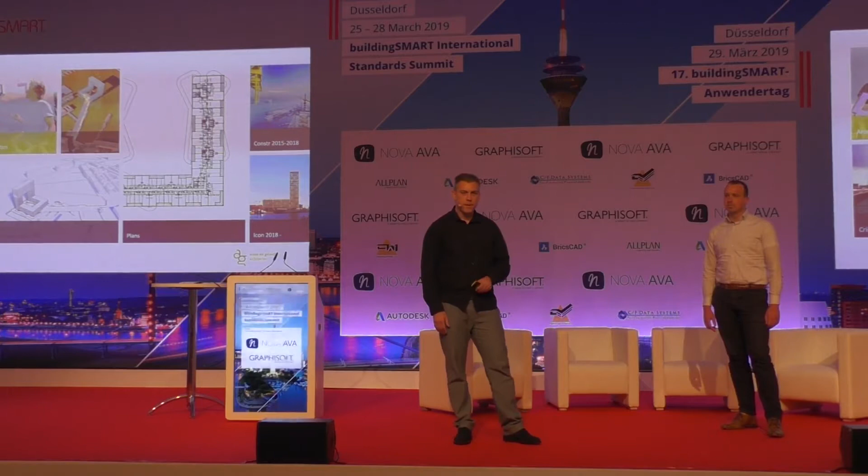But why does this building look like a chair? We were allowed to build a tower 150 meters high. What should we do? Because all the local towers in Amsterdam are about 90 meters high. It's a housing project, so we need to take into account where people would like to live. It's no surprise that most people would like to live in a penthouse or at ground floor. So an hourglass shape is therefore the optimal solution.

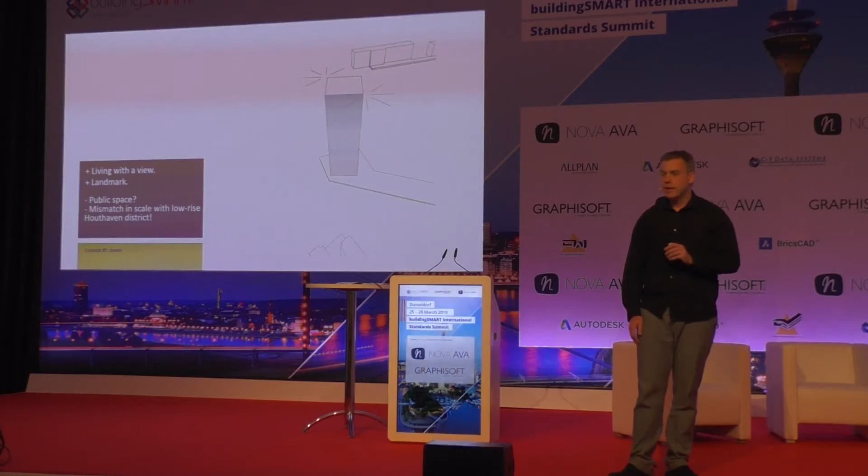Of course, we tried many other shapes. Let me recap months of hard design work in a few simple steps. A tower - a high tower would definitely be a landmark. You would have a great view over Amsterdam and you can even see the sea. But what about the public space? Tower entrances are always windy, the view is for the happy few, and the surrounding area, Houthavens, will be low-rise.

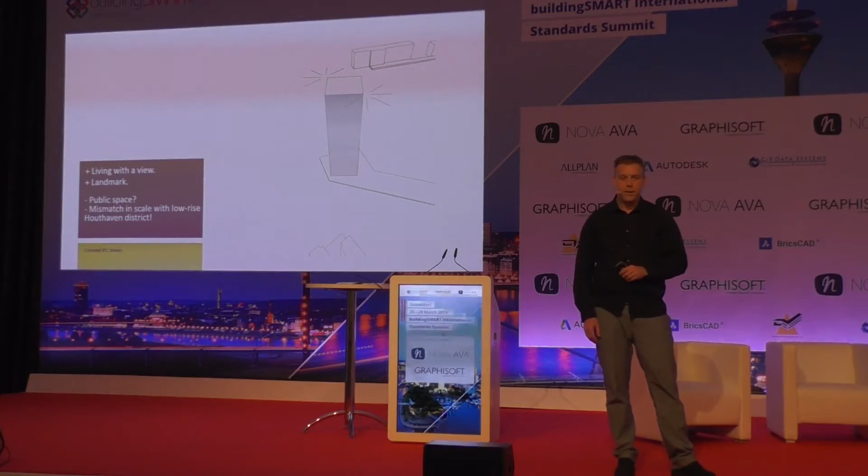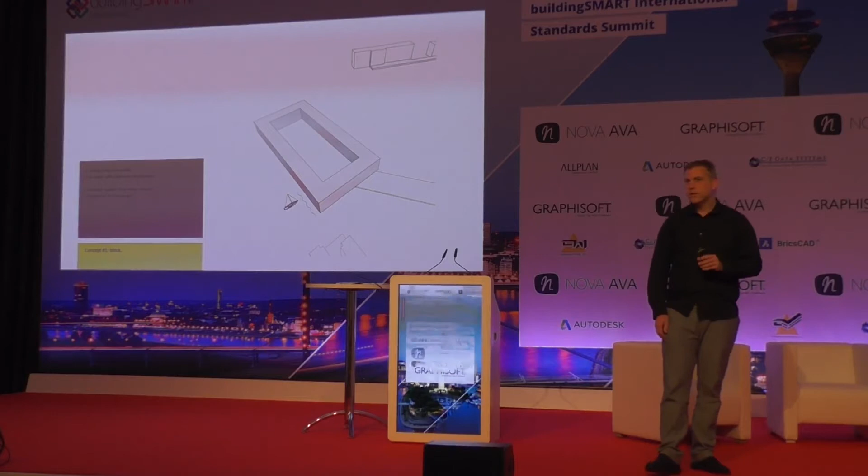A block then. Everybody would be living at the ground floor, near the water. The building would be in scale with the surrounding Houthavens, but there's an interior space. We would say, make it public, but the residents would like to keep it private. Oh yeah, we also got a footprint in the design brief, and a building like this would never fit.

A block tower then. Lots of people would be living with a great view. It's a high-rise, so it can become a landmark, and lots of people would be living on the ground floor near the water. And if we lift the building 2 stories, we also solve the public space issue. Now, Pontsteiger means ferry dock. The old ferry dock was demolished to make room for 2 layers of parking, public spaces, entrances, and a new ferry dock. On top of that, the block tower.

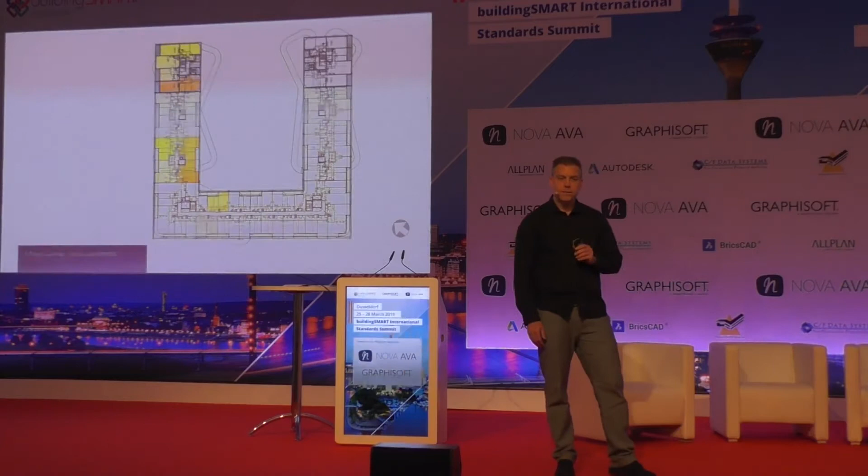Low-rise and towers contain 300 rental apartments. On top of that, the part that we call the bridge, which contains 66 market apartments - expensive apartments with a beautiful view. Okay, Jeffrey, let's build this landmark.

Thank you, Menno. Very nice to see that an architect with such a vision can realize such a beautiful project. But how do you organize such a project? For us, it all started with agreements, because with agreements you can come to a good collaboration, and with a good collaboration you can make such a landmark.

So, how do we start? Get a room. If you get in a room with people, you can discuss the different ambitions that all the parties have, and you can stretch each other to do a little bit more than they're used to. So that's what we did. We defined our ambition, and then we started.

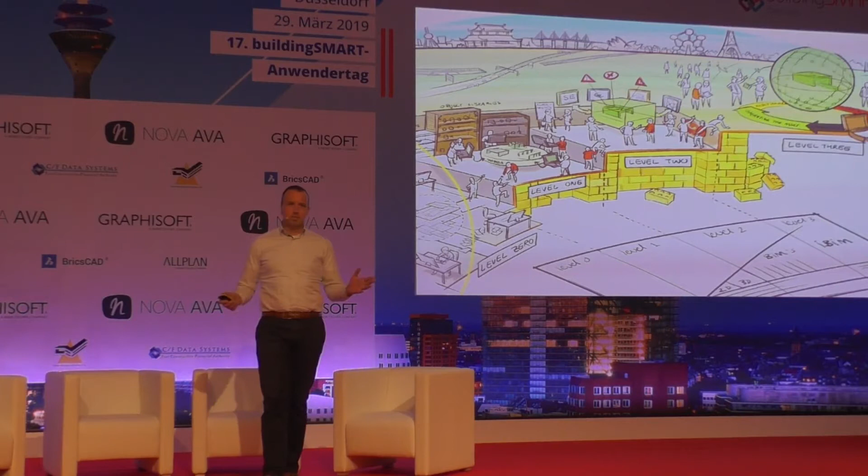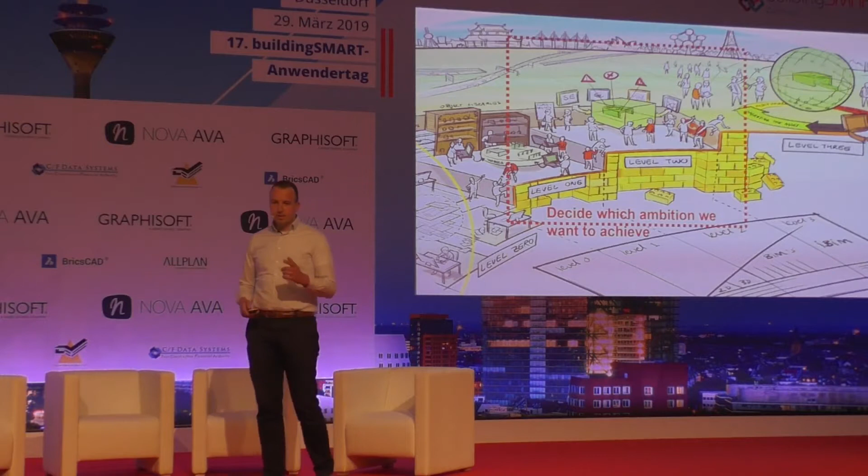So we want to share and organize BIM models throughout the whole supply chain. And we decided with the whole team that this will be the vision. What is our way of work?

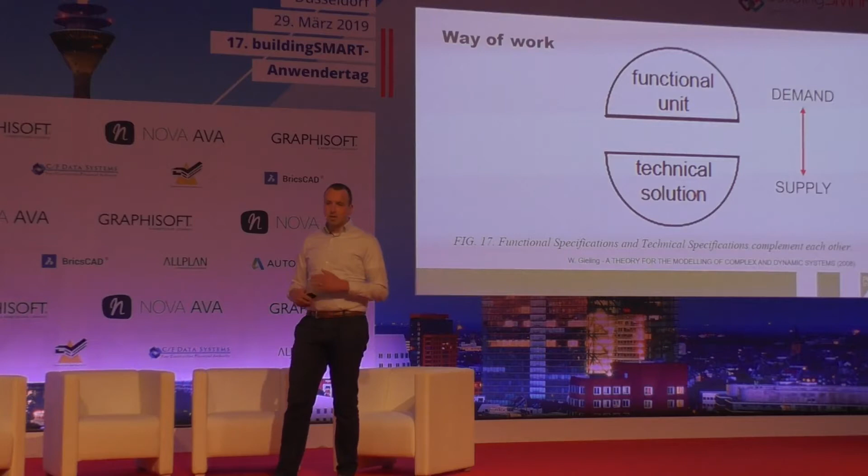So we also didn't reinvent it ourselves, but we borrowed it from Gielingh, and we used a hamburger model. I don't know if you know it, but it's a way to look at a project and organize it concerning information management. It has really a demand and supply side, and it's the key to have focus on the project itself, so everybody doesn't have to look at his own part, but has to look at the total.

So you have a demand side with designers: the architect, the structural engineer, the MEP engineer. Afterwards you get together with the suppliers, with the people who install the MEP, and you get all the knowledge on the table and get the best product for the client.

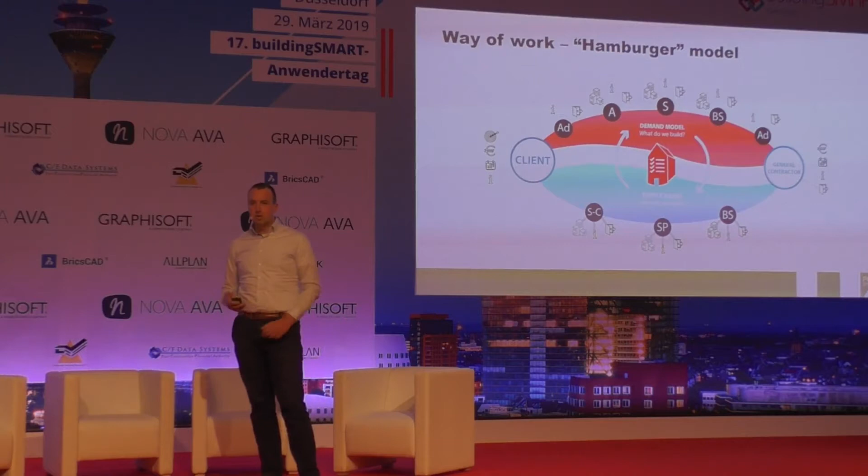So, two parties who not only built this project, but also developed the project. The most beautiful thing I think that happened here is that we got one vision on how to build. No company started with its own standards, just from scratch and with all open standards in mind.

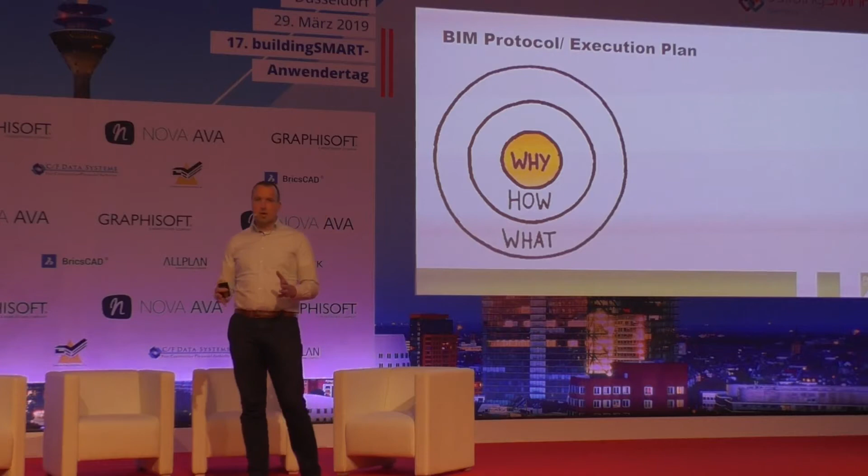So, typically naming the why, the how, and the what, so we could convince everybody who wants to join this project, knowing what is expected of them. So, a simple plan.

But a plan is not only a plan if you don't explain it. So we all made supporting documents to explain to people how to use open standards, because in 2014, 2015 in the Netherlands, it was not common to use open standards and agree on this kind of things.

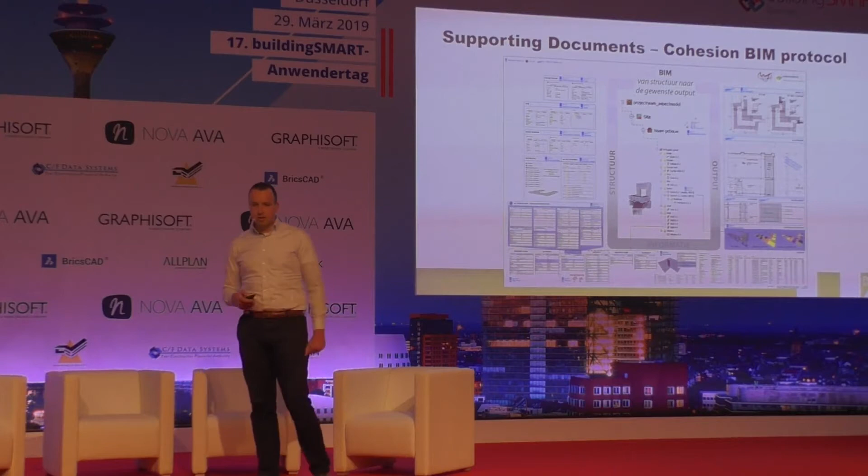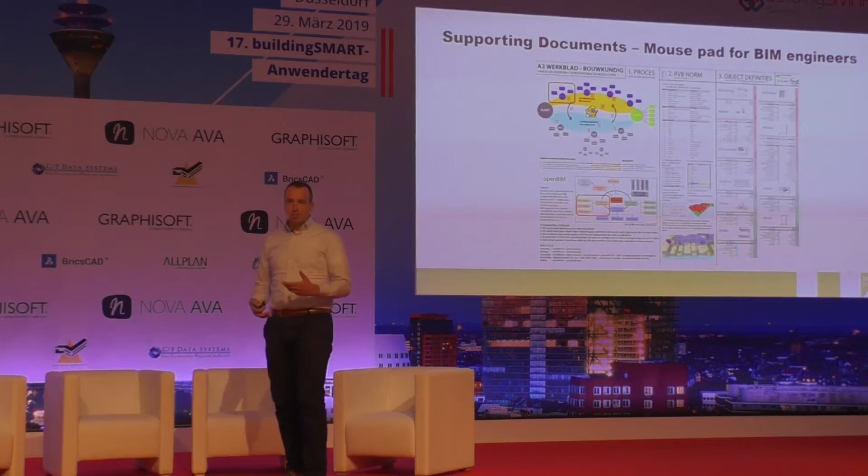We made mouse pads for the BIM modelers and BIM engineers to make it easy for them to follow our agreements, because you can say, hey, here's your contract, do like the contract asks you to do, but you can also motivate them and help them to really accomplish that.

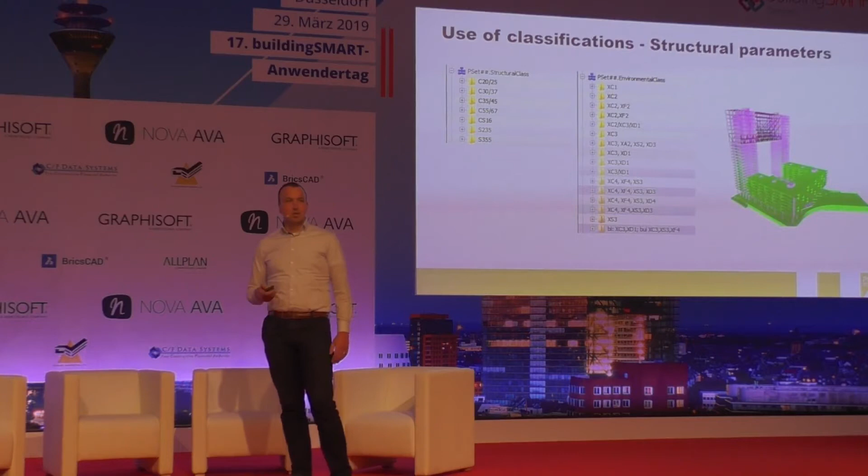So that was really the story about agreements. And then we have to go into the project and help each other: help each other export the right IFCs, help them put in the right information and find it by use of classifications, and make sure that if someone doesn't get it, you explain what's handy about it. So we can do all kinds of stuff to show other people how this works.

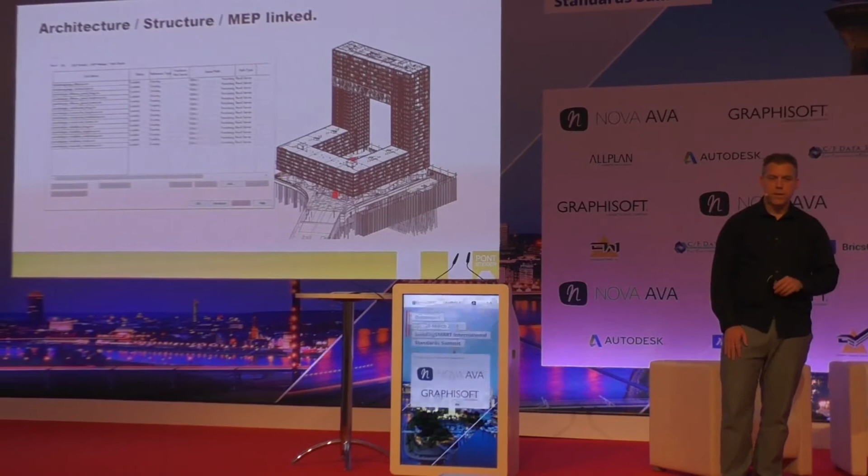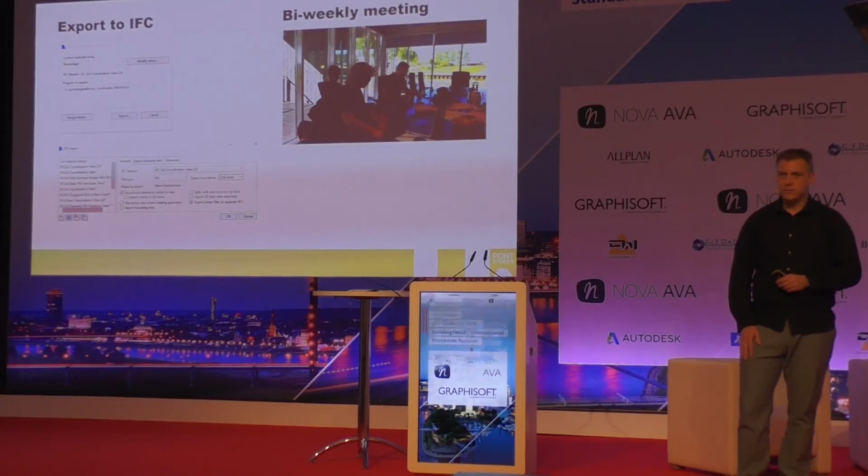5 years ago, we were still getting used to the Revit server and all the demands regarding openBIM. So every 2 weeks, we would export our models to IFC, which was then checked by the contractor and discussed in meetings.

Now, we not only need to get together, we need to start working together, and get even more technical with more people. That's why we decided to dedicate every Thursday to the project. I would start in the morning modeling. At 9, there would be a BIM meeting where we discussed all the issues and clashes. And yes, there's a big difference between an issue and a clash.

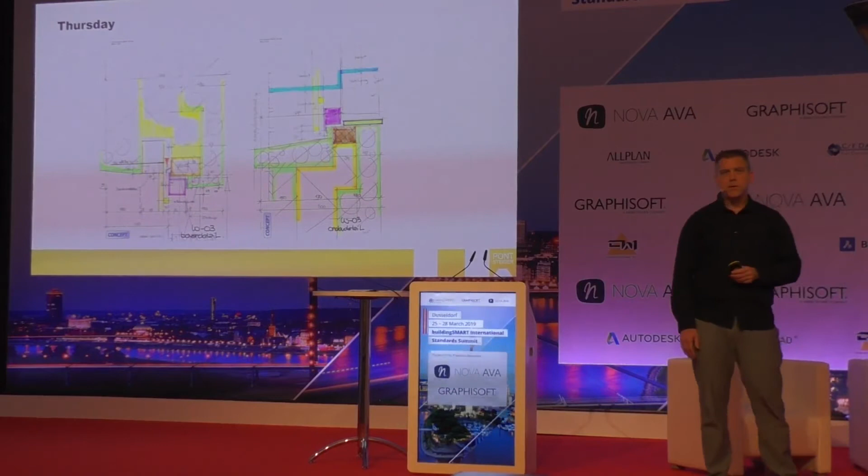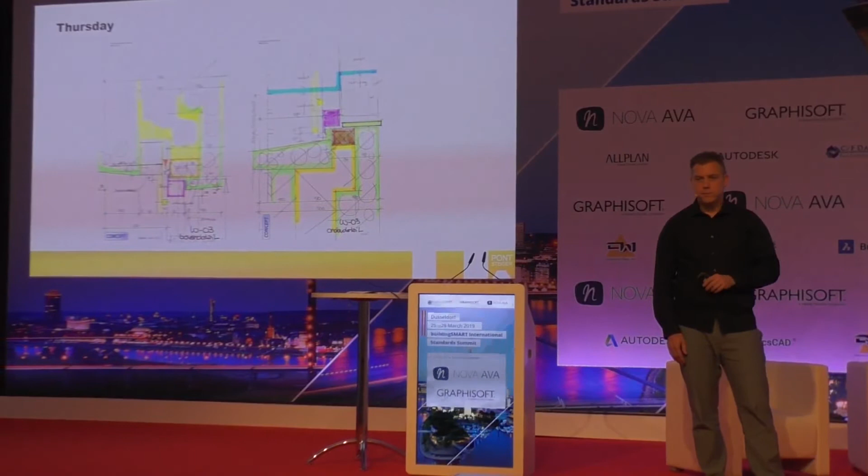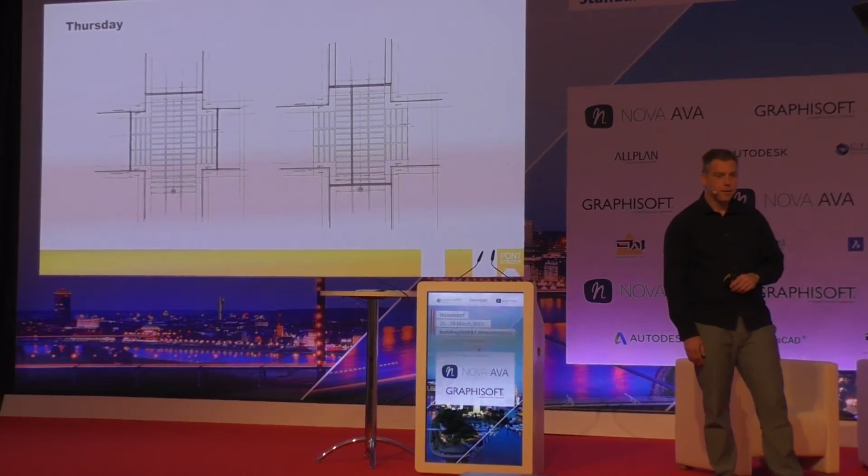For me, as a modeler, it was very convenient to stay all day. Usually after a BIM meeting, lots of people would go back to the office, but I would stay and work on the issues at hand. All day I would attend all the technical meetings, so details were drawn on flipovers and smartboards, generating direct input for the model. We work with people from all over the country, so elements and their engineers had to come from all corners, so spending time efficiently was key.

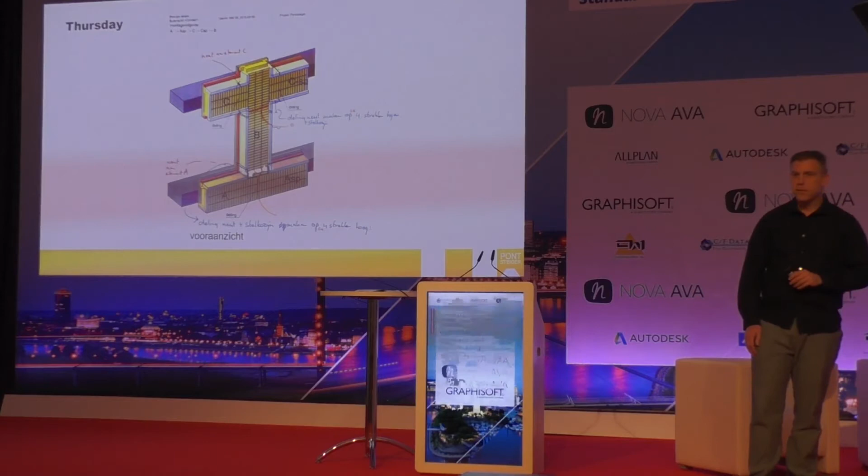And by the time they went home, they would check up on me and could already see some of the elements in 3D we had already designed in the morning.

And now let's build together. The openBIM approach is applicable to anything. No islands, no secrets, no worries. We share everything we do and make. And yes, it can be very scary, especially for smaller companies who are afraid of being taken advantage of.

Concurrent engineering is a place outside most people's comfort zone, but it makes building a lot more fun.

So when you get together and make good models, the next step is to coordinate all that information in those models. So how did we do that?

Starting point: the Hamburger model. It allows us to get focused on the several points of model coordination, and I will take you through it briefly in 4 steps.

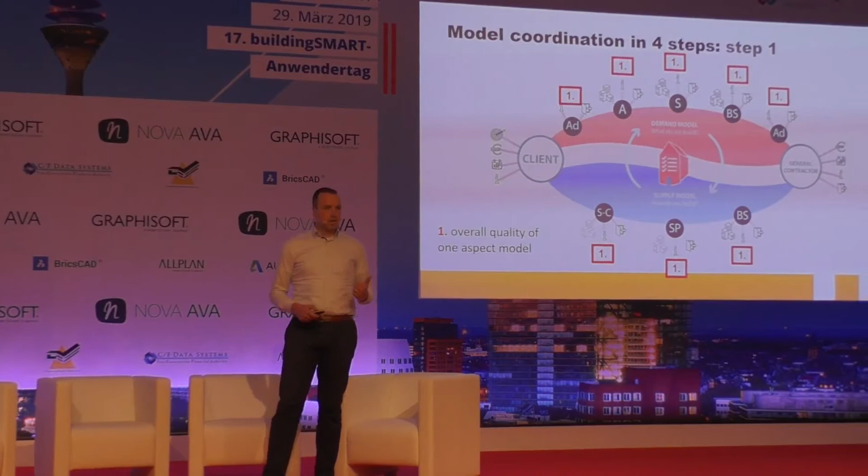So the first step: first of all, check if the model is okay in itself. Did it comply with all the agreements that we make? So check the different parts of the agreements, and if it's not okay, fix that first, because if you want to coordinate, this is the basic requirement.

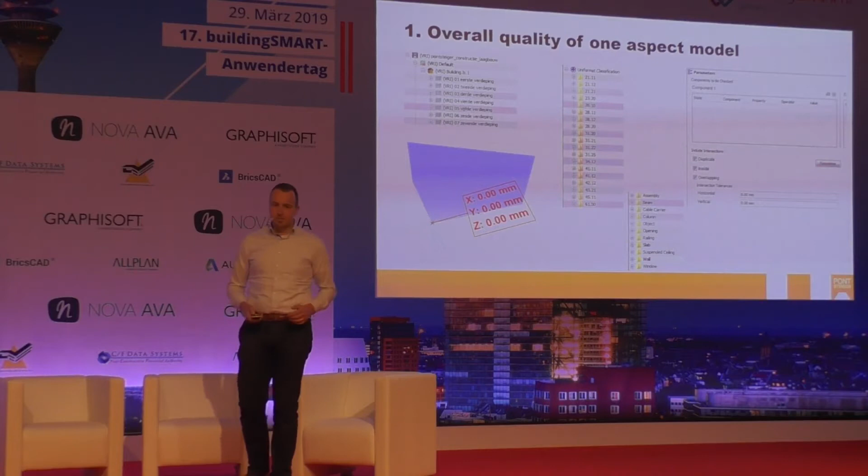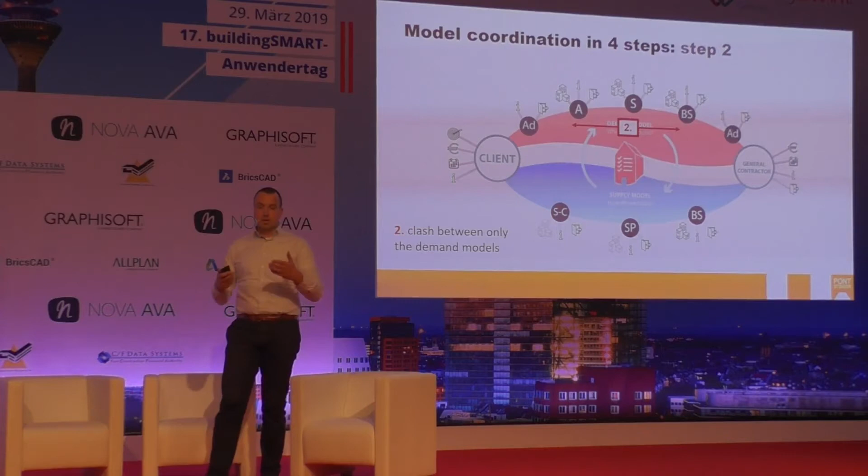Then step 2: you want to get your demand models aligned, because it's the communication towards the suppliers which gets them working. So we did 2 things: we did visual control, looking at the models and detecting any errors, but also clash control, setting rule sets between the different disciplines to make control about it.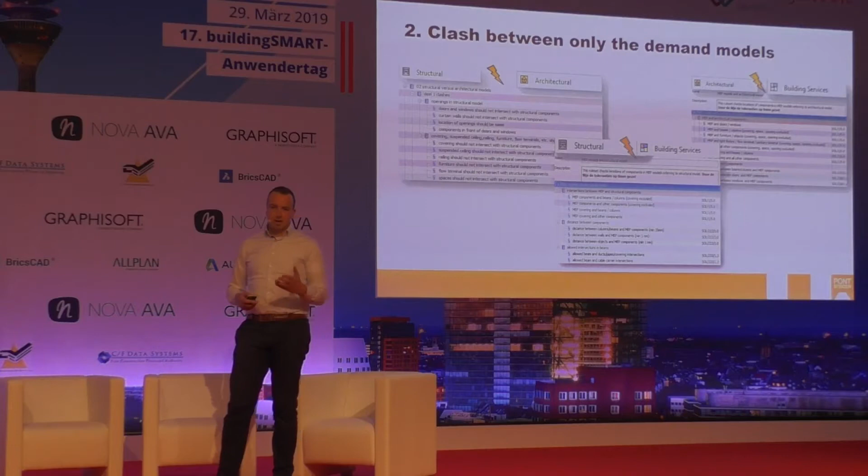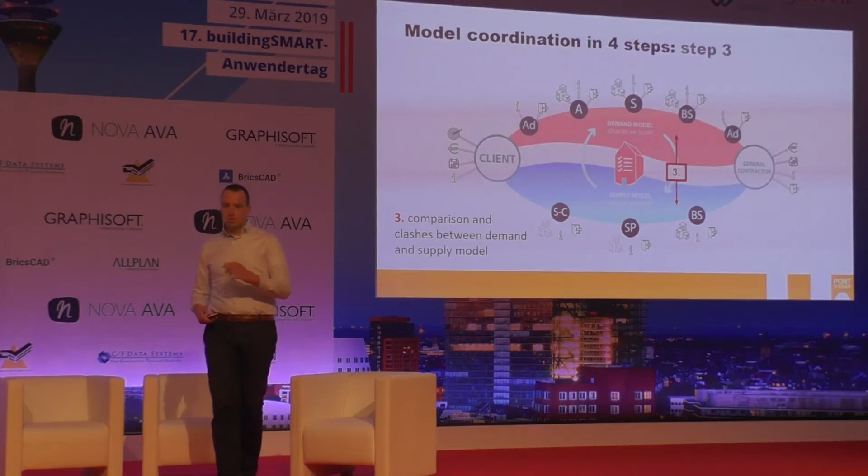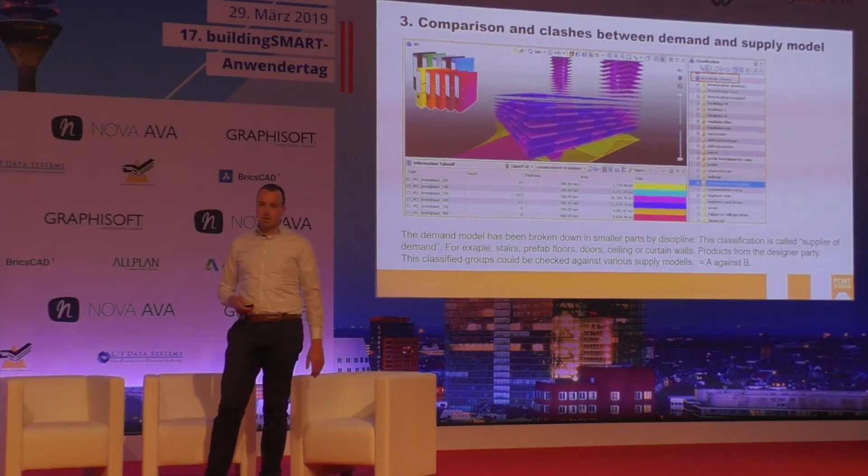Then step 3: look at whether the supplier delivered what is modeled in the demand model. So you can check if it's within the agreements, and then you can filter the model and check if it's okay. So you make the demand model and overlay it with the supply model, and you can check if it's okay. You can look at the different parts of it, and by clash control you can automatically detect if it's okay.

So this is a supply model, and it detects any violations. So here you see all the things you may have to check.

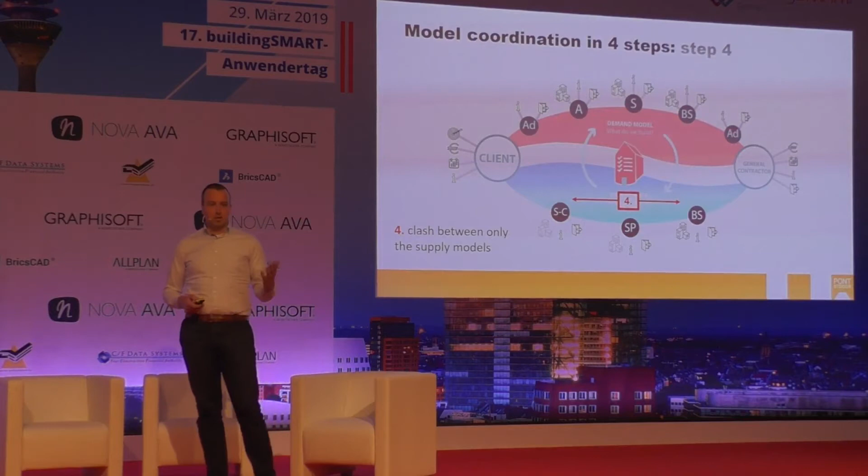Then step 4: check the supply models with each other, because this is a crucial step towards assembling the building on site. So the detail level really gets up, and it's really important to check this throughout the whole project to have no problems assembling the building. So here you see a beautiful example of that.

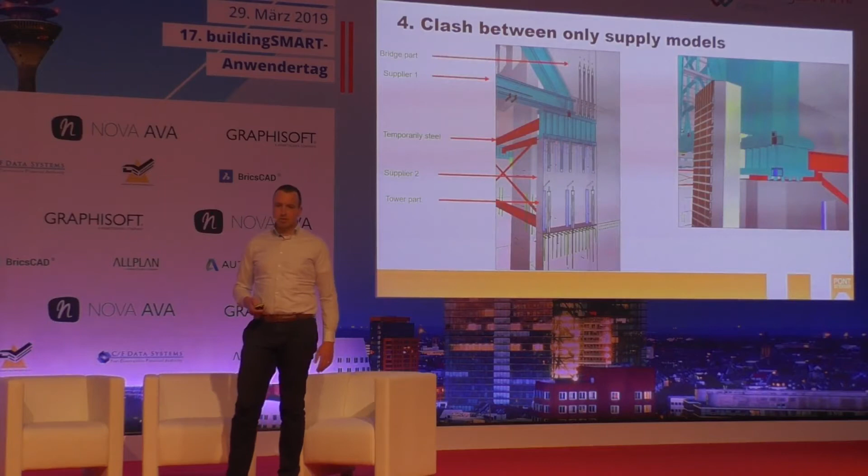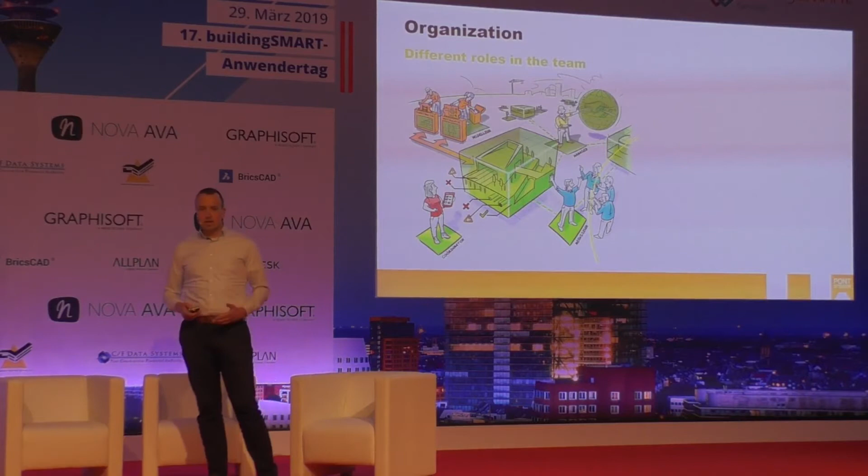Then, how do you organize all these model coordinations? You have different roles. Every team got its own BIM coordinator, and we had, because of the scale, also 2 BIM directors, Mark and Mike, who were really great. Lex and I were thinking a lot about which agreements you have to make, and these were the pitbulls who really made it happen and got all the parties aligned. So really great job what they did.

And what they really did is activate the whole team using trusting models. And it's really an achievement, because at that time not all the companies were used to working like this. So you see all kinds of pictures about working together with the models in mind, helping each other, and I think it's a really beautiful example.

BIM director, a new profession in the building industry.

With BIM, remarks should not be made on 2D drawings. This is a thing of the past, since annotating a 3D model into old-fashioned 2D drawings takes forever.

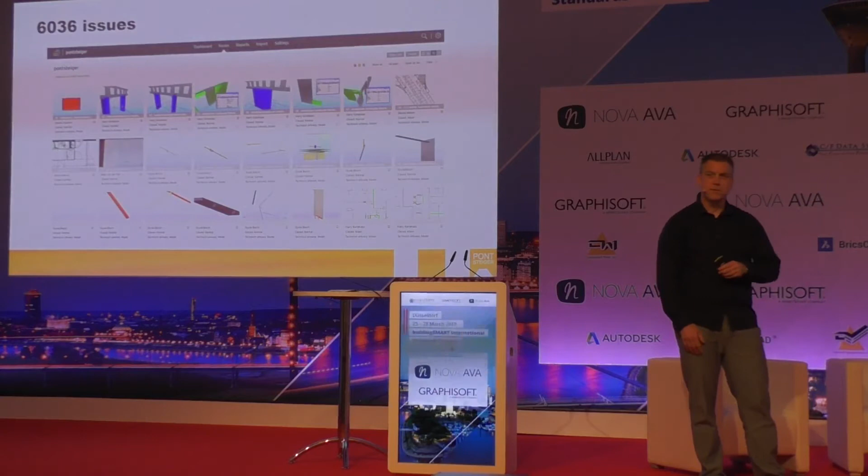The best thing about openBIM is the export to IFC. Because every building phase was a couple of months too short, we may have created a few issues we couldn't resolve before creating new ones. About 6,000 of them, 800 of which are mine.

5 years ago, we were still getting used to openBIM and didn't know all the IFC parameters just yet. For example, the Dutch NL-SfB classification code has been around forever, but as architects we don't really use it that much. Contractors especially use it for filtering and sorting.

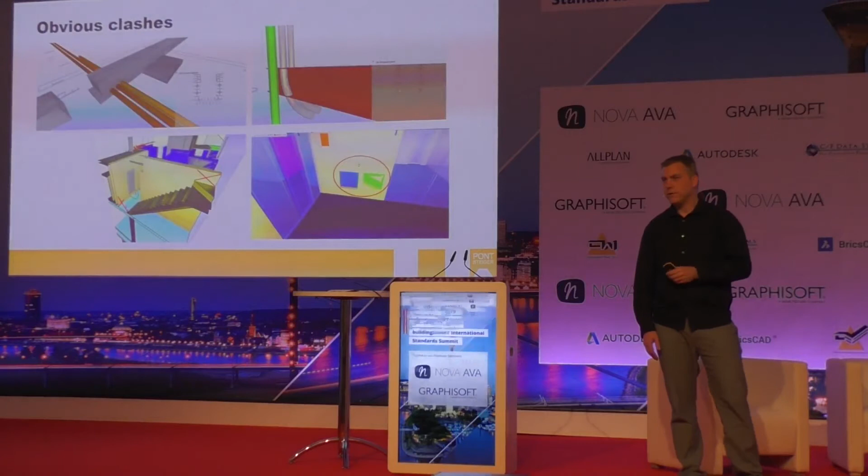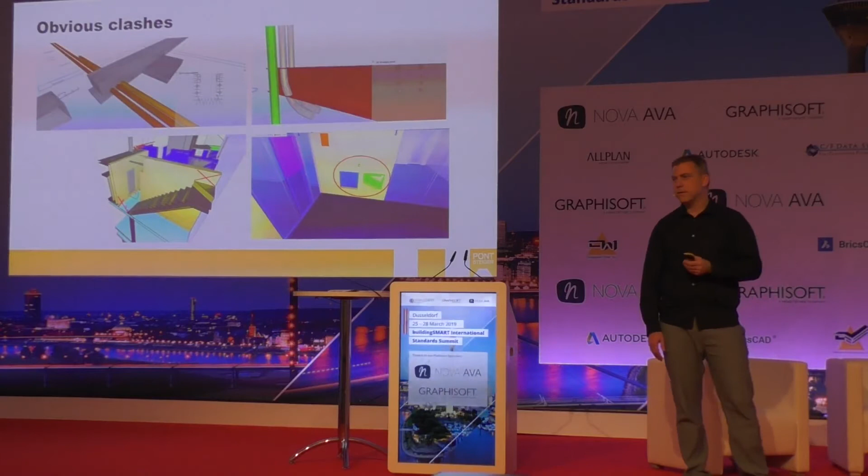So all these issues were stored in reports that we would discuss every other week. Now, clashes - everybody knows what a clash is. A clash is when the contractor, in Solibri, checks if geometry intersects with other geometry, or checks if a window can still be opened and doesn't hit a column.

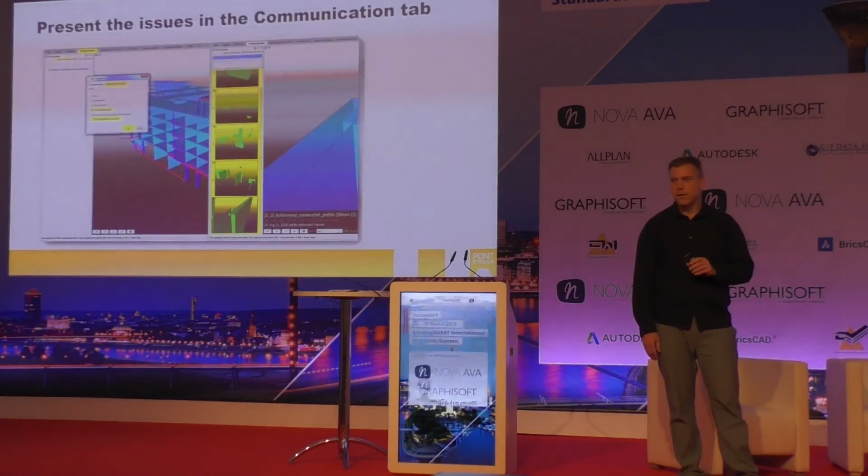As a team, we got to test the issue management platform BIM Collab. This is a website, a portal where all issues are stored and accessible for all team members. Issues and BCF files can be uploaded directly from the Communication tab in Solibri.

When creating an issue, you can decide what kind of message you want to relay: is it an issue, fault, clash, request, inquiry, or remark? We just stuck with issues and clashes.

Keep it simple. I would sometimes create an issue if I wanted someone else to change something in the model. Usually this is already discussed over the phone or in a meeting, but by creating an issue, the whole team knows that we discussed this.

In this example, I show Harry, the structural engineer, one wall opening he should remove and one he can leave in.

So I create the issue, Harry then changes his model and resolves the issue. And this is very important: the resolved issues are still open. They're then checked by the contractor, and if agreed upon, the issues can be closed. If not, the issue can be reopened.

Looking at slides in a meeting is nice, but I'm a modeler, so I have to fix these issues and clashes. With BIMcollab came the BCF connector. There are other connectors around, but this one has the advantage of a direct link to BIMcollab.

In Pontsteiger, we've learned 2 important issue management lessons. The first one is: always be very careful when creating issues.

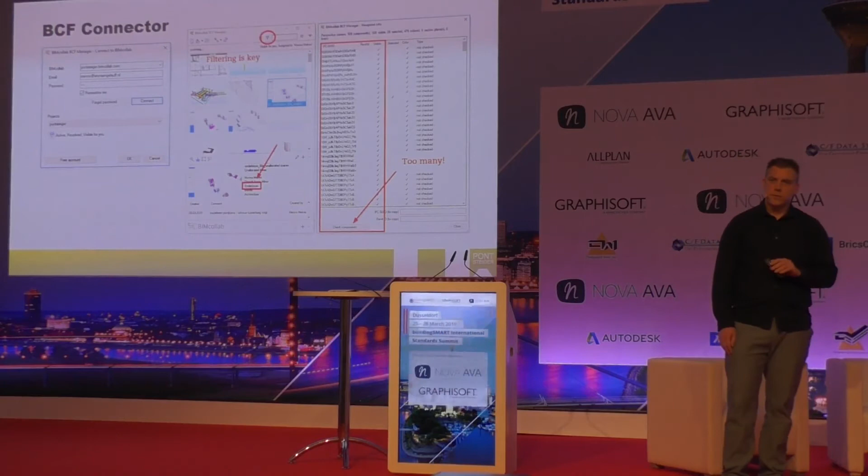You can also use the milestone to push issues forward in time to the next building phase, because most of the obvious clashes I showed you earlier are less important in the design phase. Of course, you need to keep them in mind, but work on the bigger picture first. Being able to open a window or change its glass panels is far more important when designing a building.

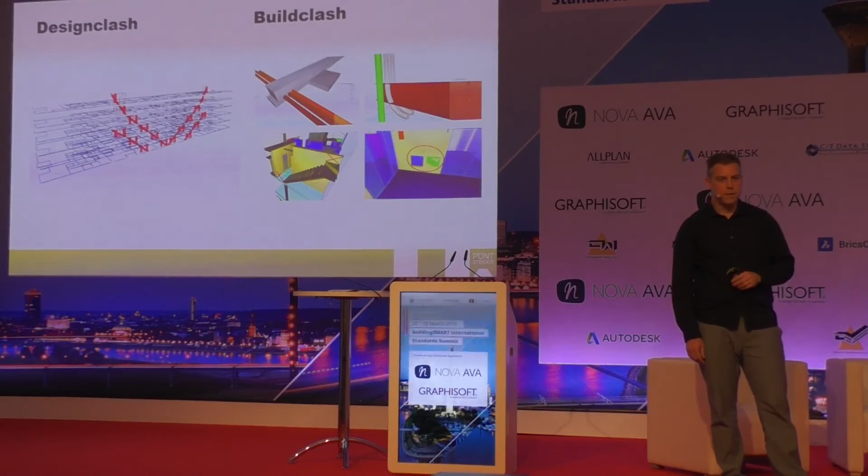Pontsteiger followed the 80-20 rule in everything. 80% of this building is prefabricated. At 60 meters high, from a boat, 4 steel frames the size of a bridge were placed on top of prefabricated concrete walls. They all fit - no cutting, no welding, no breaking, just hoisting and fixing.

If you think 6,000 issues is a lot, it's necessary. To build this precisely, we have to simulate everything in the BIM beforehand.

Pontsteiger is big - really big. All the prefabricated elements are big, heavy, and numerous. I even had to cut a few of these in half because the crane couldn't lift them.

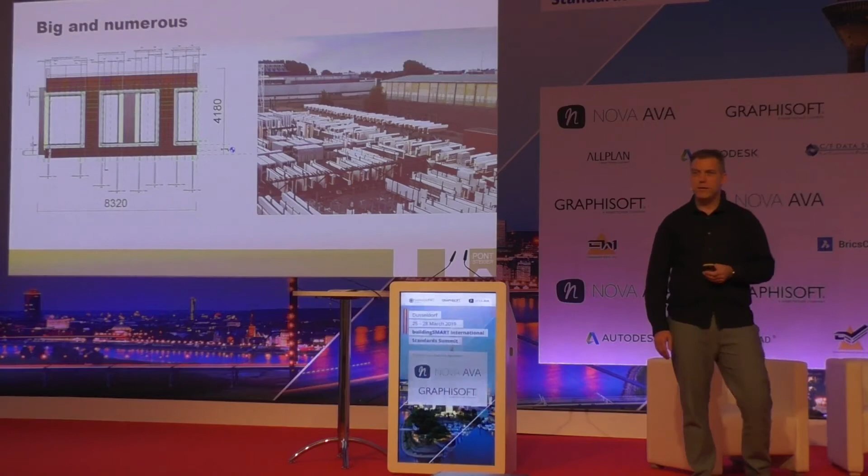That is the mass of the building. At ground level, we've created 4 beautiful curved pavilions with wooden curtain walls and straight glass panels.

And here we find a hidden treasure of prefabrication: concrete windowsills, 400 of them, 280 unique ones. So you see that prefabrication is not just about the sheer number of repetitions.

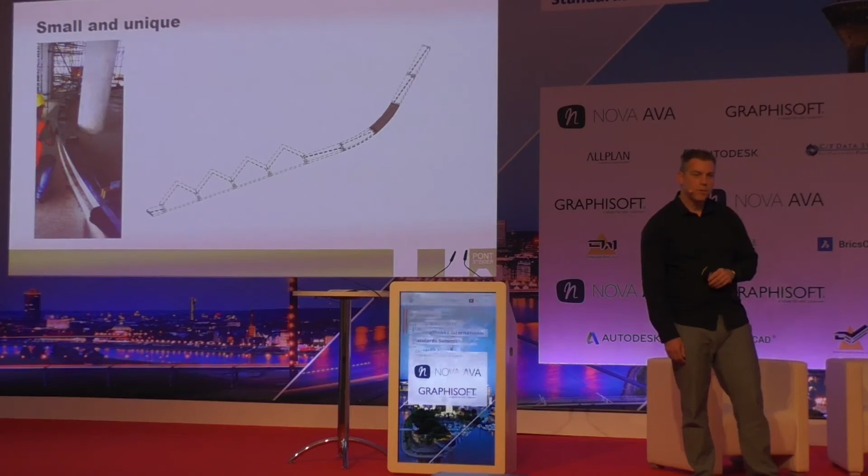Okay Jeffrey, tell me how you got all this onto the site. So it's one thing to have the ambition to do it like this with all the prefabrication, and in the Netherlands it's really a trend to do more and more prefabrication. But it also has consequences for the way you organize your building.

So we had to support the site in the right way. What did we do at the start of the project? We made sure the construction site was totally in BIM, not only to visualize what's going where, but also to think about logistics and communication with the municipality and other things you have to encounter.

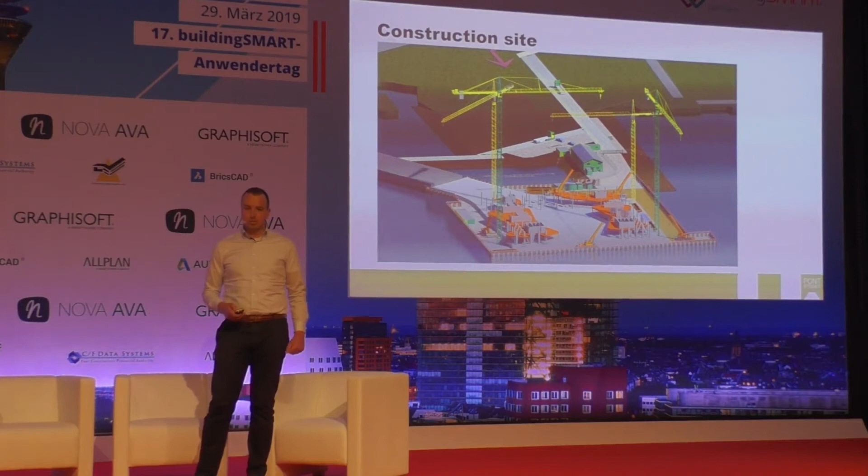So what we did is think about the crane movements and crane weights, what's possible. But also we thought about how it will get there, how the crane will stand on its own, and maybe it has consequences for the things we have to build. So temporary facilities are also important to take into account when you think of BIM. It's not only about the end situation.

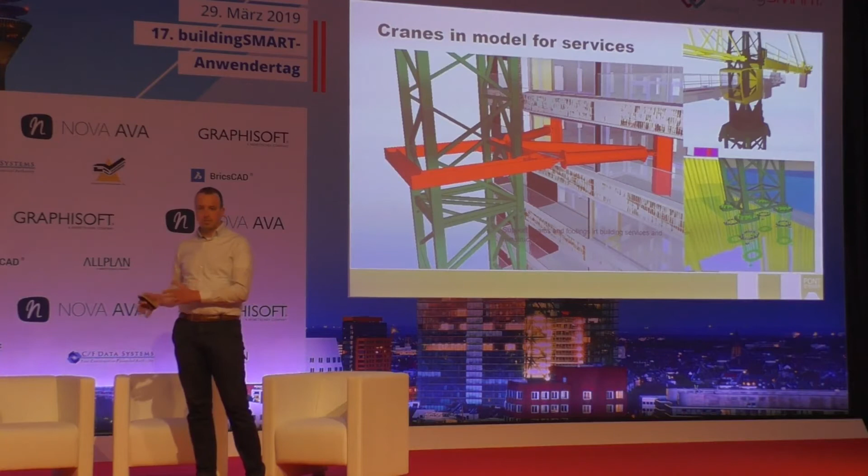So what did we do more? Because with all the prefabrication we have elements, but the elements had to stay in the right position. So all the props and anchors that were needed were also taken into a BIM model. We made sure there was no drilling necessary on site. We had a lot of anchors and props, but they were all coordinated so nothing had to be drilled on site. That's really a time effort, but it has a beautiful result.

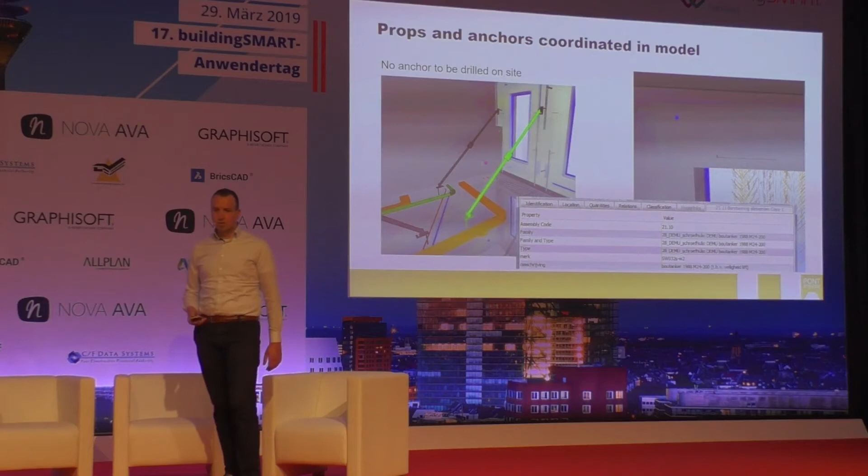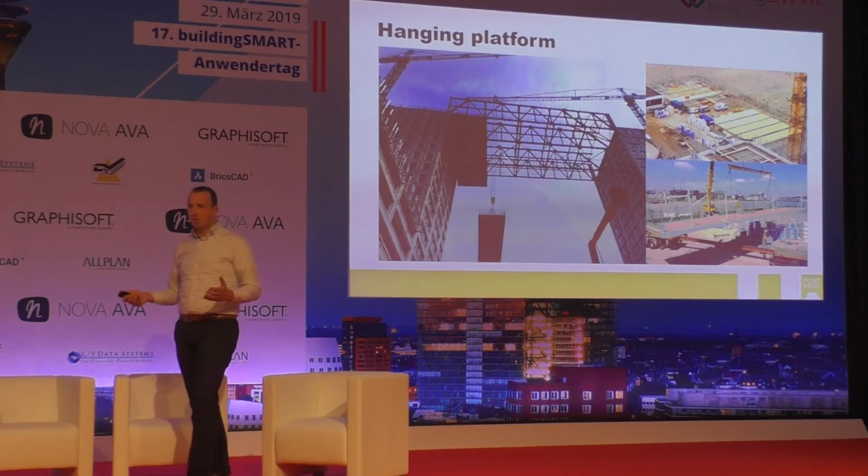Then we had another thing, because with such a bridge construction, how do you do the ceiling from beneath? That's really a challenge for the whole construction team. So what they thought about was making a hanging platform. But how do you design a hanging platform like that? By designing it first in BIM.

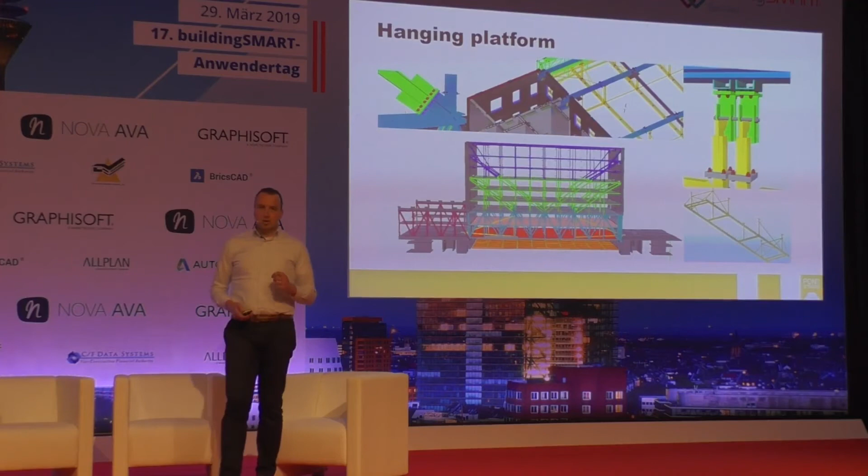So you can think about the consequences, make sure it's possible, and then - really important for us as general contractors - you can work safely. Because if we can't work safe, we don't work at all. So this is a way to get a beautiful result, but in a safe way.

I think we've shown in this presentation and in the way we did BIM on this project - I believe this is BIM at its best. Not only because we made a landmark with it, but also because we had beautiful details in the building, some you will see, some no one will see at all. But this is really beautiful in my opinion, and we had a beautiful team. I believe I've made more friends on this project than any other.

And the beautiful thing is that they're all proud of being part of this project. And we are even prouder that we won the award with this project. Thank you very much.